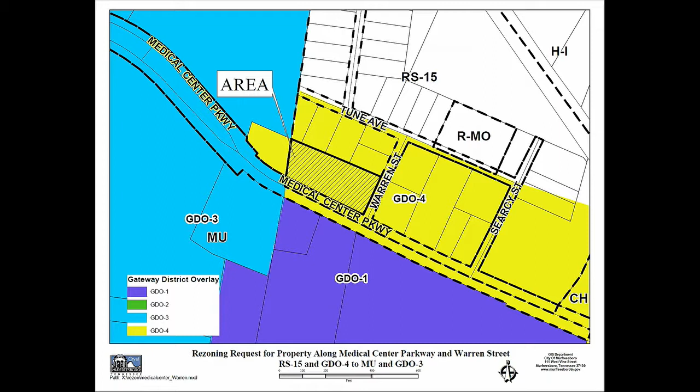Just across from this property is the city's fire station, the new Fire Station 4 that's under construction, and the fountains are just to the west of the property. We do have a representative of the applicant in our audience if you have any questions regarding this application. Otherwise, I'd be happy to answer any questions either before or after the public hearing.

I did want to mention that the comprehensive plan does identify this as a mixed-use area, and it's also identified as the West College Street Mixed-Use Redevelopment Program, which recommends redevelopment of this property since, as it is now, it's not at its greatest potential, and that it be redeveloped with mixed-use, high-end residential or commercial retail uses. So this would be consistent with our master plan.

Thank you. Any questions for staff? If not, let's open up our public hearing. Anyone who wants to speak, please come forward.

I'm Steve Moore, I own the property at 1211 Warren Street. I just have one question: what's the difference between GDO4 and GDO3? Thank you, Mr. Moore. We'll answer that at the end.

Anyone else? So we'll close the public hearing.

Staff, sure. There's not really a whole lot of difference between GDO3 and GDO4. The uses permitted are all the same. Primarily, the biggest difference is that GDO3 is only for properties that were owned by the city and sold to be developed, or are currently owned by the city.

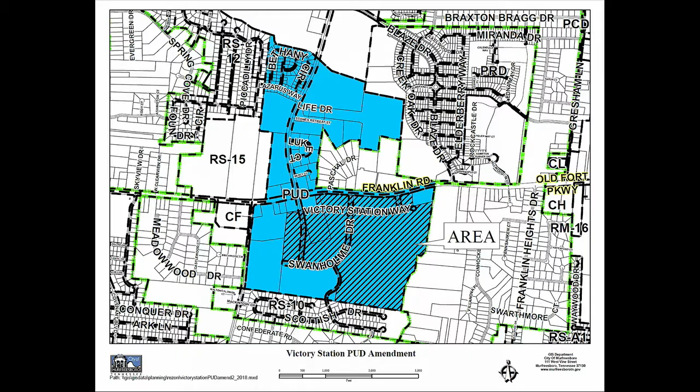In my staff comments, I identified some proposed uses that gave staff concern. In times past, when uses in planned developments are being proposed, both Planning Commission and City Council ask staff if we see any conflicts. Some uses concerned us either with how the development type looks once developed, or the compatibility of uses. Those uses I put in bold and italics so you could recognize the differences.

The applicant and applicant's representative approached staff and volunteered to make changes to the list of uses permitted in response to our concerns. We met with them and explained why some of those uses concerned us.

In particular, multifamily — they were proposing to add multifamily to some parcels, and we were concerned this application would allow those by right, considering the changes we've been asked to make by Planning Commission and City Council regarding multifamily. Another example is drive-in theaters and wrecker services — the land use type just doesn't seem compatible.

So what I've got, and I printed it on paper that was too big, but I'd already printed it, so we kind of like that. I'm thinking of Councilman Young — whenever I did this, he always appreciated it. Absolutely, so rather than reprinting it, that's what this giant paper is.

Mr. Matt Taylor emailed this to staff today, which also includes on the third page and beyond the amended list of uses they're proposing to remove — a little different from what's in your staff comments. I'm going to ask Mr. Taylor to come to the lectern and go through their requests. Mr. Joe Swanson is here as well. These are uses they're proposing to modify. If you have any questions, we'd be glad to help answer them.

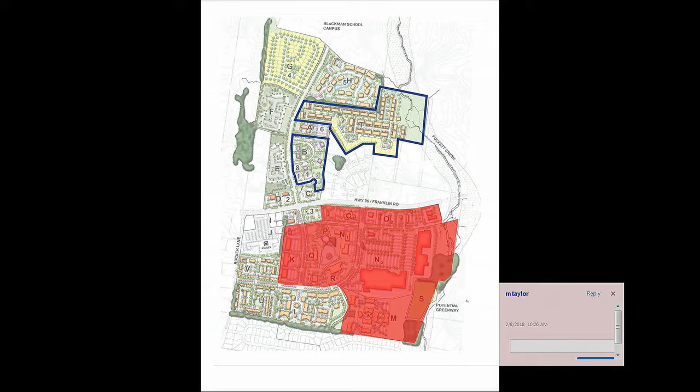Always. As Ms. Green said, we have made this request. We feel the request we've proposed reflects changes in the commercial development environment since the original vision of this development 18-some years ago. I believe you'll find the requested uses in the amended packet are more service-oriented in nature versus several of the previous plans, which relied on large big boxes that we don't believe are very realistic anymore — while also being sensitive to the neighbors and the original vision of the project as a whole.

So going over the letter I sent to Margaret Ann, I'll go through that. From the first list were uses that were not originally allowed that we had proposed, and we've since said we'll just remove those again — they will still not be allowed.

Those would be three-family dwellings, four-family dwellings, multifamily, drive-in theater, a parking garage as a principal use, and a warehouse as a principal use. Those would be allowed as secondary or accessory uses if a larger primary use needed them.

The gas — liquefied petroleum in bottles and in bulk — motor vehicle sales of automobiles, motor vehicle sales other than automobiles, the wrecker service, and the package service, we've removed from our requests.

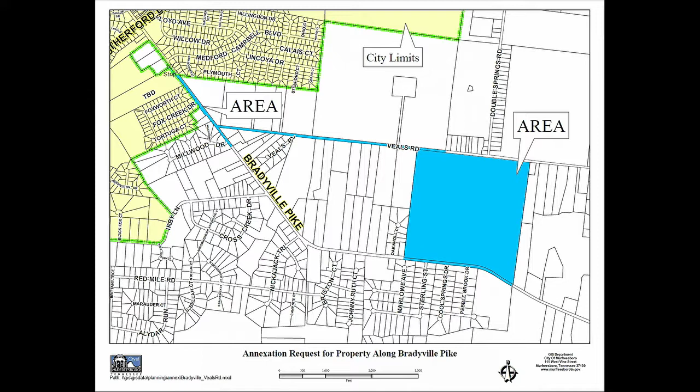So if you approve this tonight, we would recommend that you approve the revised study area as opposed to what was advertised. I've handed out a map showing the revised study area, the area of the Veals Road right-of-way excluded from what we are recommending.

The City Council approved the annexation and the zoning of those properties on first reading. However, we've been holding the second reading at City Council as Mr. Friedson, the developer of those parcels in orange, seeks to acquire a water line easement to be able to provide water to his proposed development. So just wanted to give you a status update on that particular request right now.

Just to the east of where it says Lincoya Drive, right here, where Ms. Green has her cursor, we've had discussions with possible developers looking at that parcel, and I think it would be our expectation that at some point in the future, you'll probably be seeing an application for that parcel.

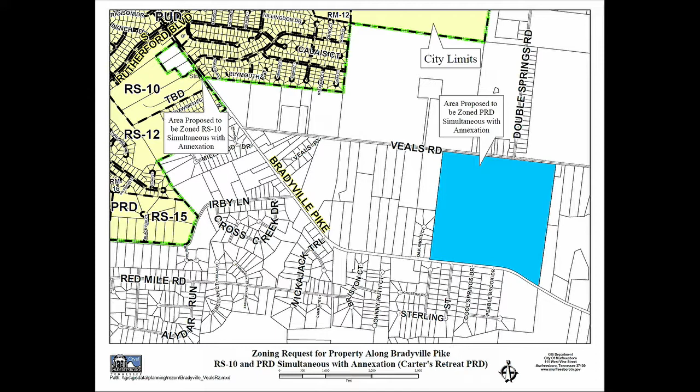Mr. Bromley. Thank you, Chairman Wade. The next public hearing is the companion zoning request. I'll go ahead and start with the 10-foot strip over there at Brady Estates that I mentioned earlier. Brady Estates is zoned RS-10, so we propose that that 10-foot strip be zoned RS-10 as well to be consistent with the existing zoning at Brady Estates.

The bulk of this request in the public hearing will be the proposed Carter's Retreat PRD, which is the 134-acre parcel located along the north side of Bradyville Pike and the south side of Veals Road. Property is, as I mentioned before, primarily undeveloped with the exception of a single-family home and several outbuildings. The previous item on the agenda was for the annexation of this tract. Subject property is surrounded on all four sides by unincorporated county.

To the north across Veals Road are some single-family residences along Veals Road as well as along Double Springs Road, including the Twin Springs subdivision. Directly to the west is an undeveloped tract as well as the Eastland Manor single-family residential subdivision. To the south across Bradyville Pike are the Dilton Springs and Bradyton single-family residential subdivisions. And bordering the property on its east side are several large single-family residential parcels.

The proposed PRD is called Carter's Retreat, which consists of 210 single-family residential lots. As I mentioned before, this property would be served by a step system, and there would have to be step fields on the property to accommodate that system. The minimum lot size is proposed to be 6,500 square feet, and the development of its 134 acres would contain approximately 85 acres of open space.

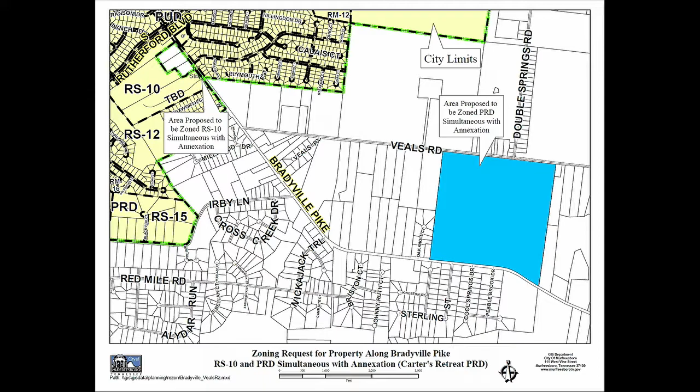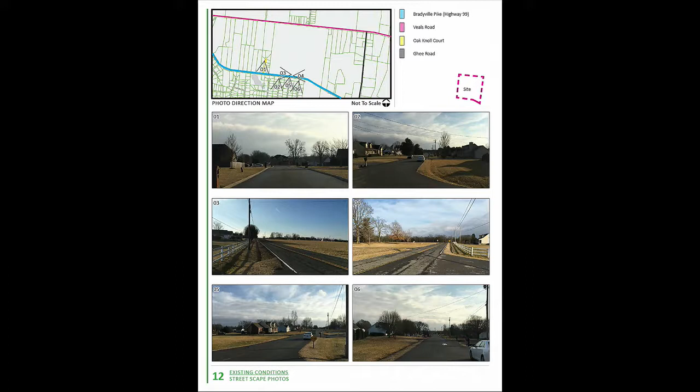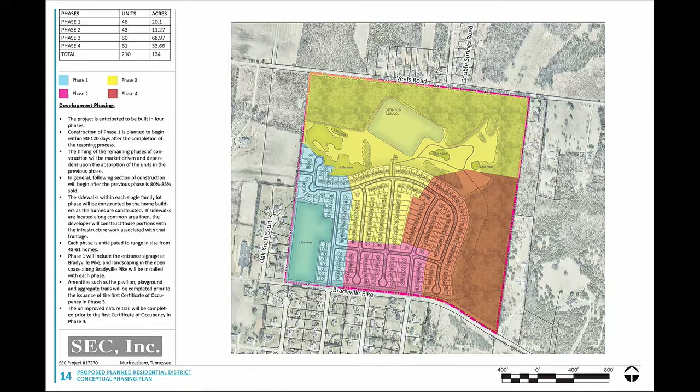There are two access points proposed to Bradyville Pike, and there's one stub to the west to an undeveloped tract. Because of the environmental conditions and physical constraints along Veals Road, the applicants are proposing not to develop the north side of the property. However, they are proposing to stub into the undeveloped property to the west, which has soils more suited for development. Once that property develops, provided it does develop in the future, this would provide a secondary access back to Veals Road to the north. But for the time being, there are two access points proposed, and both of those are to Bradyville Pike.

The minimum home size is proposed to be 1,600 square feet of living space, and exterior materials would consist of brick, stone, and fiber cement siding, with fiber cement siding being the predominant exterior material. Amenities will include a playground, pavilion, and both paved and unpaved nature trails. There will be a 30-foot wide landscape yard with berming along Bradyville Pike.

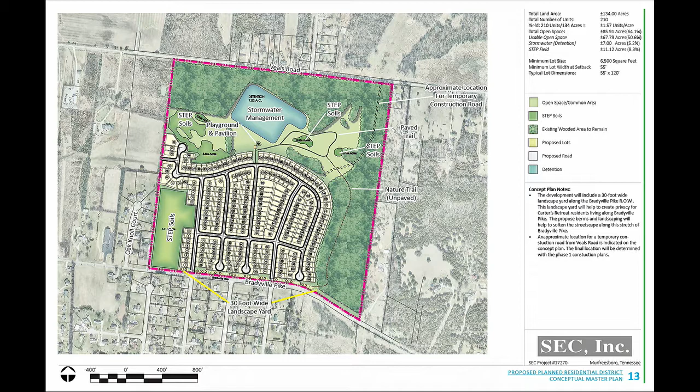As an aside, the applicant is still working with the Water Resources Department on the design of the step system and the location of the step soils. So if this application moves forward to City Council, we would ask that the applicant continue to work with the Water Resources Department on those issues prior to City Council.

The proposed density of Carter's Retreat is 1.57 dwelling units per acre, which is slightly less than the recommended density of the comprehensive plan. According to the plan, the existing zoning districts compatible with the suburban residential zone are RS15, RS12, and RS10. It indicates that this character type includes small acreages or large lot estate development, or may also be smaller lots clustered around open space. This would be the latter, smaller lots clustered around open space. Approximately 85 of the 134 acres of this tract is proposed to be left as open space.

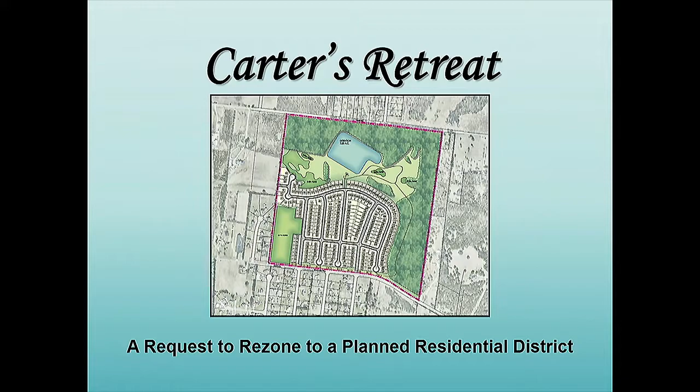Good evening, Chairman Wade, members of the Planning Commission, Rob Molchan, SEC. I'm here tonight on behalf of Sourceline LLC, the applicant. I'm accompanied tonight by Mr. Matt Taylor of SEC and Taz Lundy and Laws Bolden, the applicants. We're here tonight to present to you Carter's Retreat, our planned residential district.

As you can see in regards to the existing aerial photo, the property is located on the south side of Veals Road, which is the orange road along the northern portion of the picture, and Bradyville Pike, which is the blue road that stretches from east to west across the southern portion of the site. To the west, the yellow line there, that's Oak Knoll Court, and to the south you have three different streets coming from the residential subdivisions to the south that we'll talk about more in a little bit.

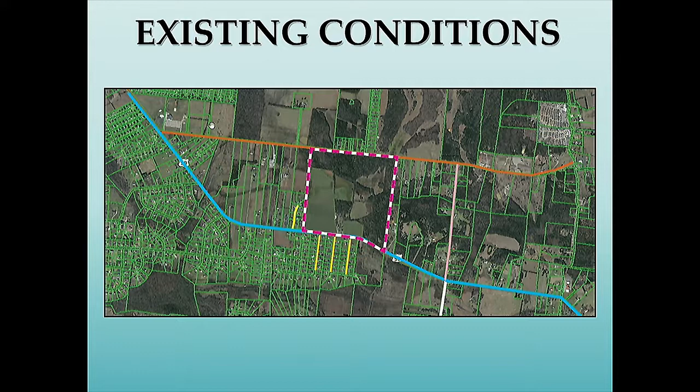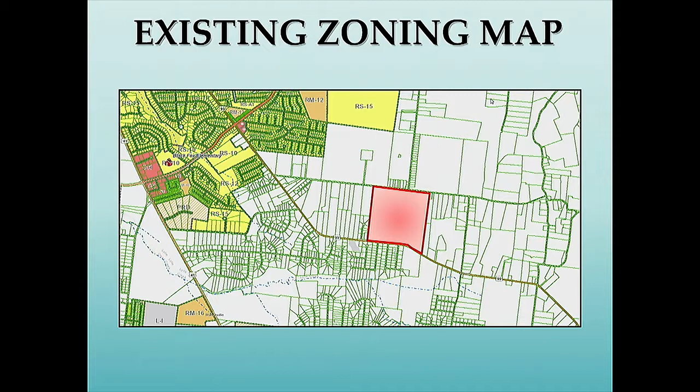As Matthew talked about, the current zoning around the development is all unincorporated portions of Rutherford County. As you can see, the portions of the city located with RS15, RS10, and planned unit developments are to the west of the development. As we talked about regarding the annexation portion, we'll be looking at the annexation of Veals Road from a connectivity standpoint back to the city, and for connectivity in zoning.

As Matthew talked about in the 2035 plan, this area is called for suburban residential character. This is a transitional land development type between rural and suburban land uses. Such types, as Matthew talked about, include either large lot developments or small lot developments that are clustered around green spaces or open spaces.

The density associated with the proposed land use map calls for 2 to 3.54 units per acre. The proposed development, Carter's Retreat, is calling for 1.57 units per acre, which is less than the 2 units per acre minimum for the land use plan. That is primarily because with this project we are utilizing a smaller lot size but incorporating a large amount of open space. Roughly 64% of the project is open space within the 134 acres.

So 85 acres of this property will be left as some type of open space, whether that be usable or unusable open space. I'll give you a couple quick shots in regards to the existing conditions out there today.

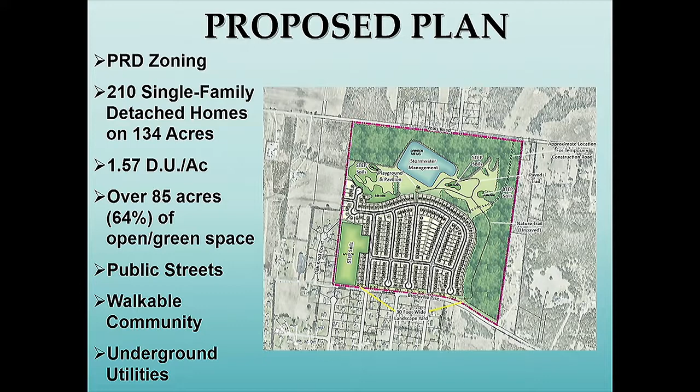All the streets will be public streets. Will be sidewalks on both sides of all streets to make it a very walkable community, and all utilities will be underground. A little bigger image to show the comparison with regards to the residential development versus the open space character of the neighborhood.

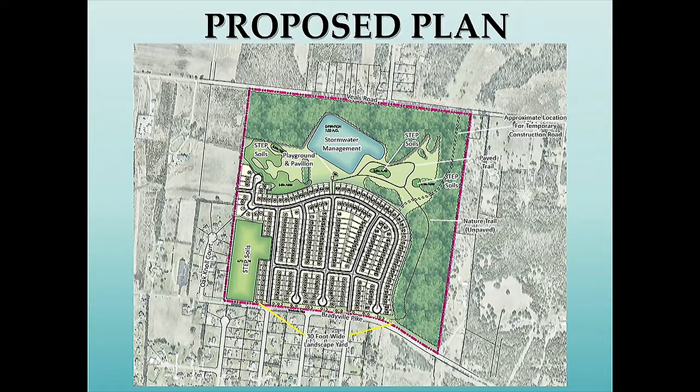Same will be for any side entry garage units that may be developed with these homes, that any side entry garage will also be 35-foot, allowing for the 4 parking spaces in the driveway. If no side entry garage is utilized on the corner lot, the setback will be reduced by 5 foot to a 30-foot front setback. Sides will be 5 foot and the rears will be 15.

The homes will be 2 stories in nature, and there will be a minimum 1,600 square foot of living space. There will be a mixture of 2 and 3 bedrooms. Each home will have a covered front porch or stoop to add some character to the front elevation. There will be 2-car front entry garages, and those front entry garages will incorporate garage windows, and the colors will complement the architecture.

Building materials in regards to the homes themselves, the primary building material on this will be cementitious fiberboard on all elevations. The front will incorporate brick and stone accent elements to go along with the cementitious fiberboard. And vinyl will only be permitted in the trim, soffits and fascia.

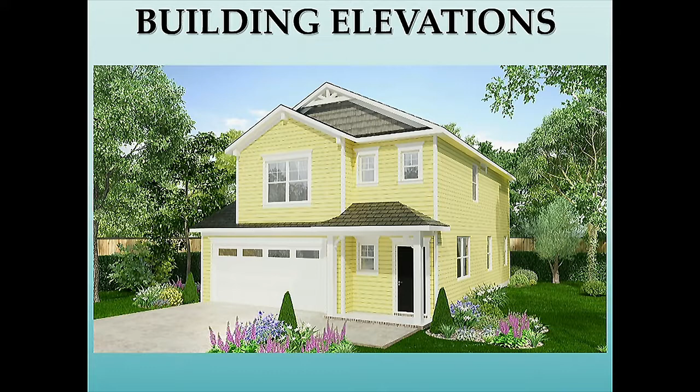Here's a couple of graphic representations of what the homes could potentially look like. And you can see the different characters and qualities and the different shake style and stuff like that in some of the gables. They are stone and brick type of character along some of the foundational elements along the front. Again, garages with front entry garages with the stoops and covered porches as well.

Amenities, as I spoke, the site is over 64% of it being open space. The main amenity component will be a pavilion and playground, which will be located at the back of the property itself, centralized to all the other roadways within the development. So as you come back, this becomes the central focus point for the usable open space at the back of the development back there.

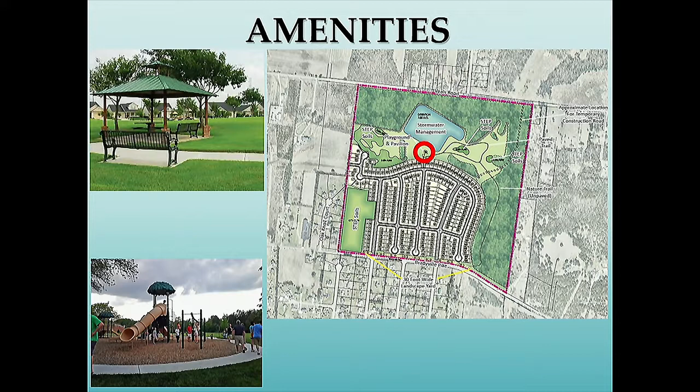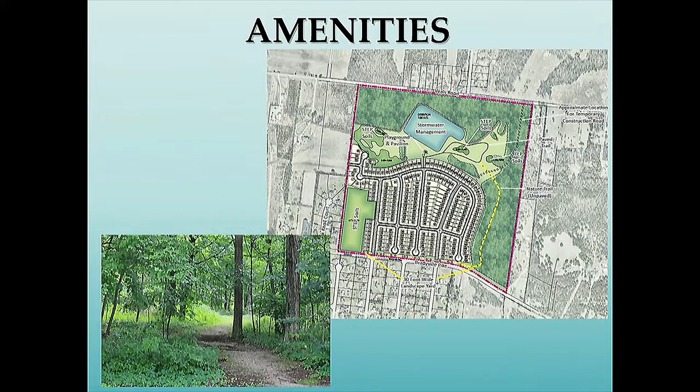We're also looking at a paved trail system that comes from the actual roadway back to the pavilion and playground area, but also a looping trail system for walking, jogging, and enjoying the outdoors. We're also incorporating an unimproved, unpaved trail section along the eastern boundary through the wooded area, conducive for outdoor nature walks, which will connect back to the eastern cul-de-sac via sidewalk, providing connectivity back to the paved nature trail system.

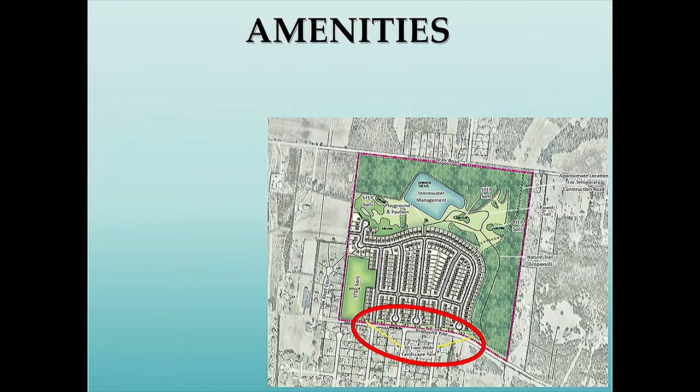Furthermore, from an amenity standpoint, we're providing a front door appearance. We're incorporating a 30-foot wide landscape yard along Bradyville Pike as our front door experience to help blend our neighborhood into the overall fabric and character, creating an extra feel of a brand new neighborhood. This will incorporate mounds, berming, evergreen and deciduous trees, shrubs, and grasses to create a good character feel along the front of the neighborhood.

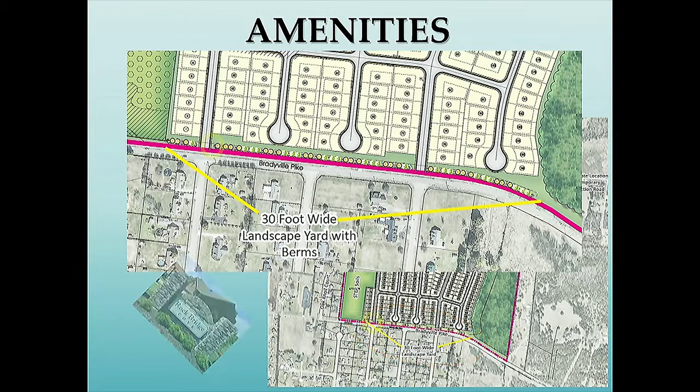We'll also be incorporating entrance signage at the first entrance at the intersection of Sterling, so you can see an example of that.

As we talked about in regards to access, we're looking at two main access points. The first will be a new four-way intersection at Sterling Street on Bradyville Pike. The second will be a four-way intersection at Pebblebrook Drive. As Matthew talked about, we have no direct connection back to Veals Road.

That's due to the large green area along the northern portion of the property, which is very unconducive to development. What we are going to provide is a stub to the western undeveloped property, with the anticipation that as that property develops, it will provide a connection back through that property to Veals Road in the future.

In our neighborhood meeting a week or so ago, there was discussion regarding construction traffic and how it will be dealt with given the entrances off Bradyville Pike. We decided to create a construction entrance off Veals Road instead of Bradyville Pike, where there'd be a lot less traffic congestion. As shown in the diagram, we've proposed a construction entrance off Veals Road along our eastern property line, connecting into our eventual phase 4 of the development as time progresses.

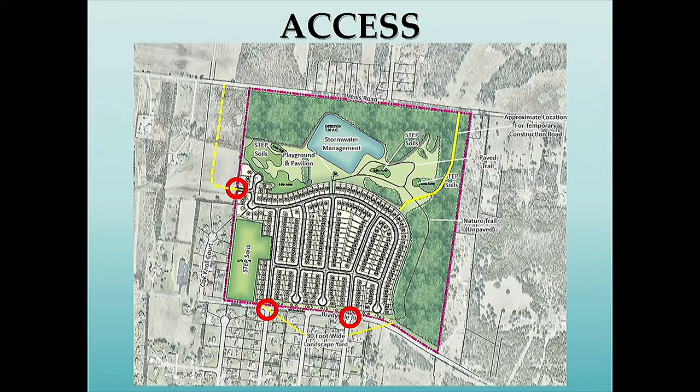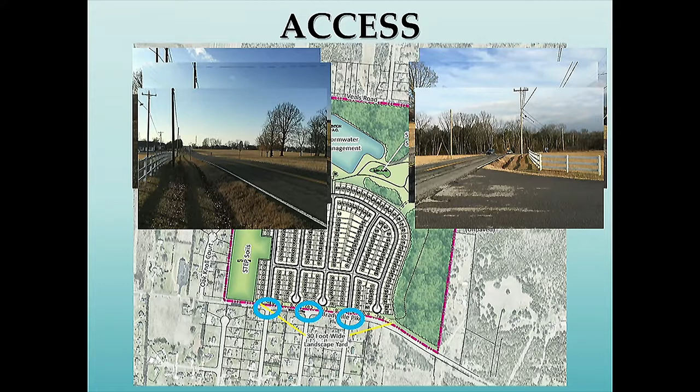And lastly, the connection at Pebblebrook Drive. You can see the view looking back to the west on the left-hand side, and the eastern view looking down Bradyville Pike towards the curve as it comes back towards the straightening out portion of the development.

I appreciate your time and consideration of this request, and I'm available for any questions now or after the public hearing. Thank you.

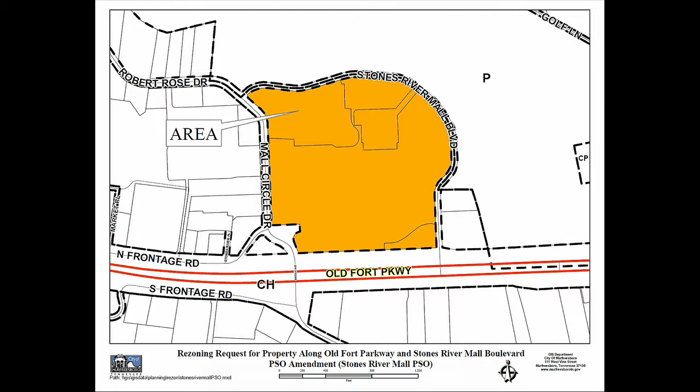Chairman Wade and Planning Commission members, the Stones River Mall located at 1720 Old Fort Parkway consists of an enclosed mall and an open air shopping area called the Lifestyle area. It's on 35 acres. In 2007, they received planned signage overlay zoning, and since then, they have been bought by a different company about 4 years ago. They have recently received approval to build a multiplex theater that's currently under construction where the food court and Books A Million was.

The changes they're planning to their planned signage overlay booklet consist of rebranding the center from Stones River Mall to Stones River Town Center, also changing the owner's name from the previous owner to the new owner's name, and signage for the new theater. I believe you all have a copy of the PSO booklet. The Building and Codes Department and Planning Department have reviewed the booklet and recommend approval. John Speed with the Sterling Organization is here to do a short presentation, and from there, I believe you hold a public hearing.

Thank you, Mr. Hope. Thank you. You state your name and address. Yes, my name is John Speed. I'm with Sterling Organization and SVAP 2 Stones River, the ownership of Stones River Mall. Let me find my PowerPoint.

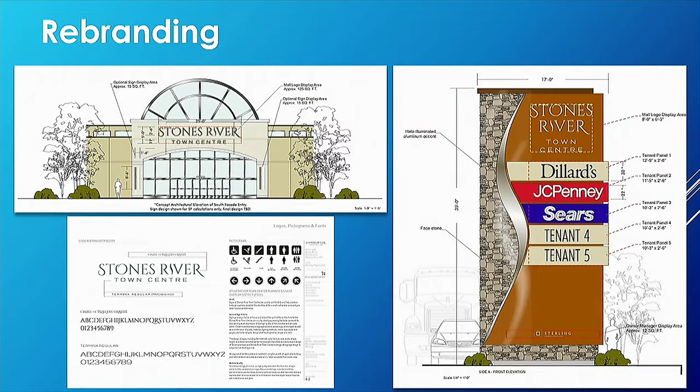That's shown on your screen? Go ahead. There we go. Okay. As Mr. Holtz mentioned, we're requesting a revision of the PSO, namely to address the changes we are proposing or currently in the process of making to the mall. The first of which is the rebranding, changing the name Stones River Mall to Stones River Town Center. That change would be reflected on the pylon sign, the mall entrance signs, and anywhere else throughout the mall that the current Stones River Mall signage is shown.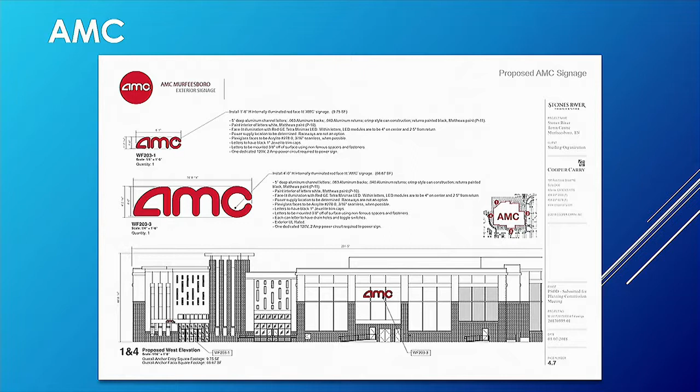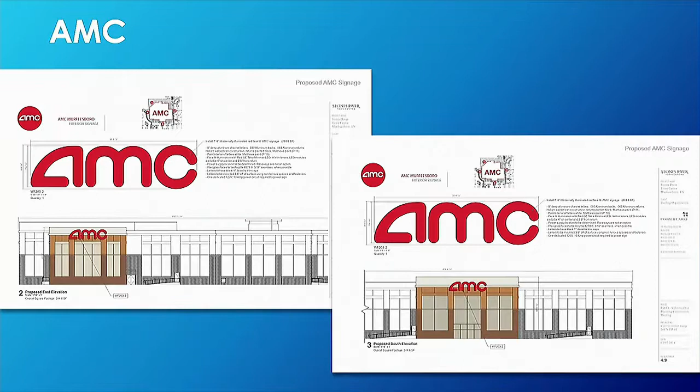The second change, which we are currently in the process of completing, is the addition of the 9-screen AMC movie theater. It's set to open on Memorial Day. Their signage was in compliance with the previous PSO. We just wanted to add it as part of this revision to make sure it was reflected on a current PSO.

And finally, as Mr. Holtz mentioned, we haven't updated this in 10 years, and so we needed to just get everything up to date. We updated the site plan to reflect the new AMC building where the food court and Books A Million used to be. We changed the ownership name, logos, updated the pictures of the existing conditions, and removed all of the old signage that was shown as existing. That is about the extent of what we're requesting to be revised.

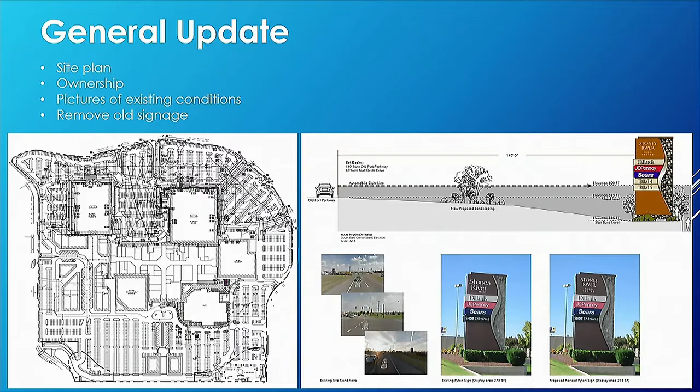Thank you. All right, thank you. Any questions from staff before we open our public hearing? All right, let's open up our public hearing. All right, let's close it. What is the wishes of this body?

Mr. Holtz, you didn't have any concerns or anything you needed us to pay special attention to here? No ma'am, all good, it's pretty simple. Just a few face changes on the pylon signs out front, and you'll see the new signs going up on the theater here in the near future. So it's a pretty clean change.

Thank you, Mr. Holtz. If there's no other questions or comments, I'll make a motion to approve. There's a motion, is there a second? Second. All in favor? Aye. Motion carries. Staff reports and other business.